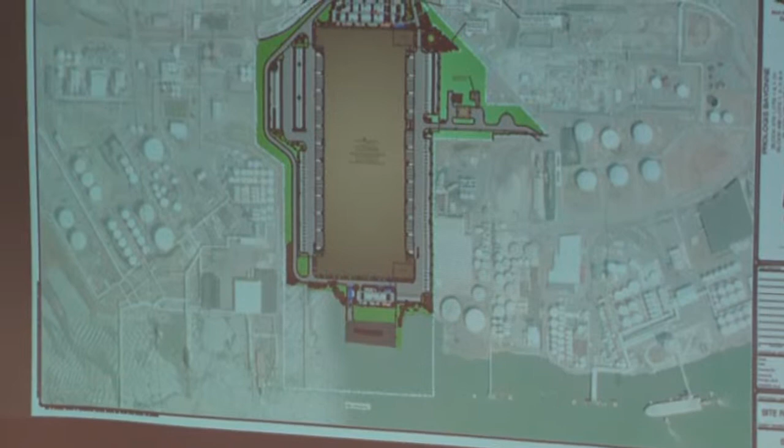So the site plan rendering is similar to what's already been presented to the board. There have been some minor modifications to that. But I'd first like to highlight that the proposed use will be warehouses throughout the entire facility.

We submit approximately 1,683,000 square feet of total warehouse. The Southern Development's warehouse, which I note as Building 1, will be 1,076,579 square feet. Buildings 2 through 5, running clockwise from Building 1, will be 151,613 square feet for Building 2, 124,496 for Building 3, 110,245 for Building 4, and 219,947 square feet for Building 5.

Looking at the site as a holistic development, we will provide a 35.7% building coverage for the entire site.

We're actually reducing below the threshold allowable for the redevelopment plan. For impervious coverage, we're at 74%. Something important to note is that for stormwater and vehicular area specifically, we coordinated extensively with DEP throughout this application, and we're actually going to be reducing the vehicular area on site. So not only are we improving the roadway network with properly paved roads and thoughtful traffic circulation, but we're reducing the amount of area that cars and trucks even travel throughout this site.

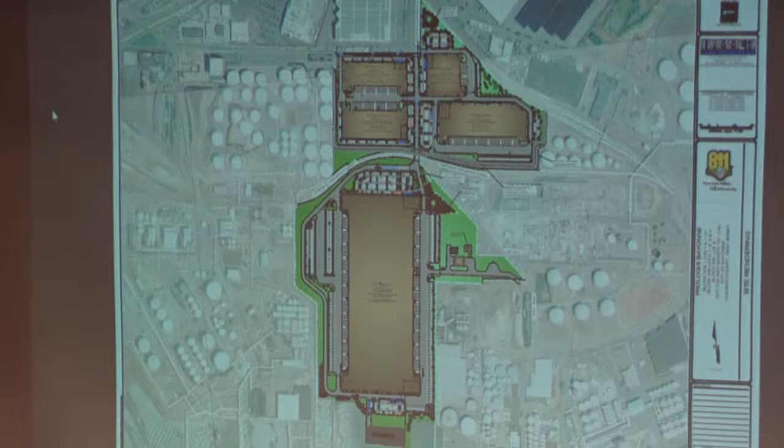In addition to that, 392 spaces for Building 1, Building 2 will have 148 spaces, Building 3 will have 104 spaces, Building 4 will have 128 spaces, and Building 5 will have 160 spaces. This totals to about 932 spaces throughout the site.

Another change that has occurred since we submitted the application was with respect to EV parking. Originally, we submitted for 35 make-ready spaces distributed throughout the site. Your board professionals did identify that variance being a little short.

Prior to this being issued, one of Prologis' initiatives is a net zero standard. We anticipate having 5% day one EV parking for each building. Looking at how the site works out, this will increase us to a total of 50 EV parking spaces, based on the parking provided at CO for each individual building.

These parking spaces will both be ADA as well as near the building entrances to allow for short transit for those people. We will also provide provisions for potential expansions based on tenant needs. But we will be in substantial compliance with the model DCA ordinance for electric vehicles by not only providing make-ready spaces, but day one EV spaces.

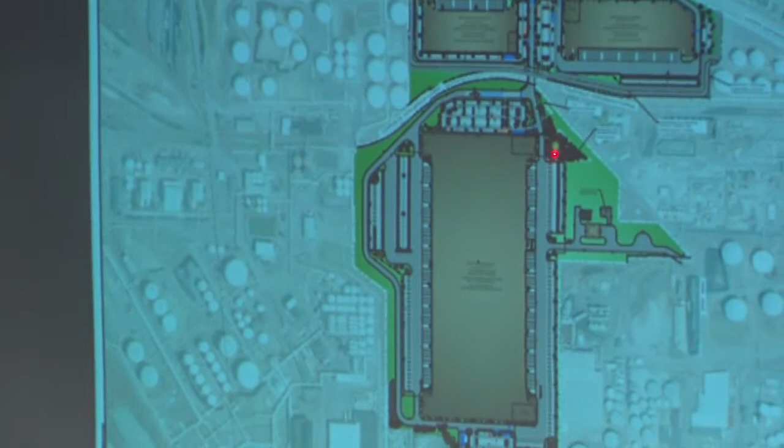Where I'm pointing, the dark green area is our open space recreational use for the southern development. It goes just past the 0.85 acres we were anticipating, so we're providing slightly more on-site. We're providing a canopy shade structure with seating and tables, and meandering walkways, since it's almost an acre in size, running east to west and north to south. At the northern tip there's another seating area, with landscape berms to visually screen someone sitting there. Understand they're in the middle of a truck facility, but this will give buffering to the visual of the trucks decompressing for lunch, as well as a slight auditory buffer.

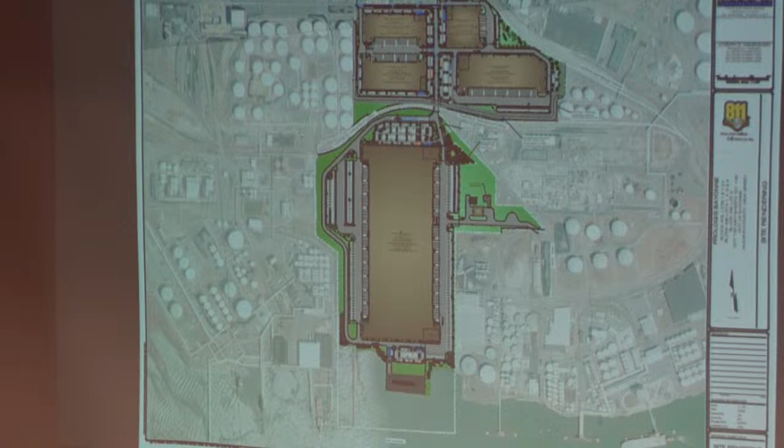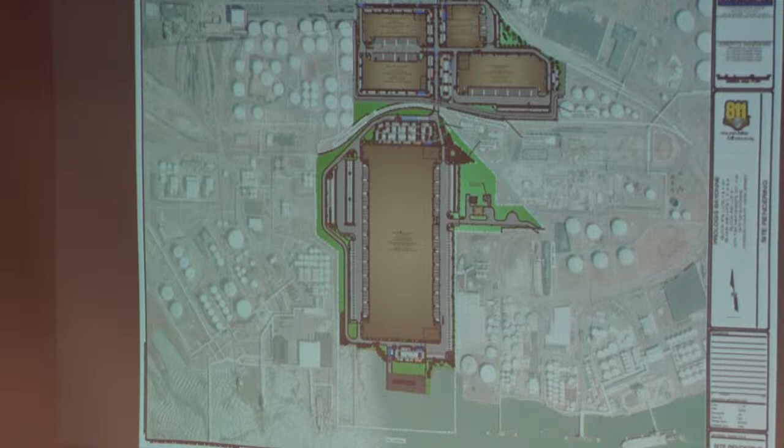Additionally, at the northern portion we're providing a smaller area, approximately half an acre, right at the very tip of the northern development along Avenue J, that's going to have another shade structure. The shade structure's colors will correlate to Prologis' colors - green, white, blue, brown - but not vibrant, slightly muted, so it's not an attention-seeking item.

The rest of the site, we do provide shade trees, evergreens, and shrubs. A comment was requested that we provide some additional diversity to our shrubs, which we have no problem complying with, and we'll provide some additional plantings as well.

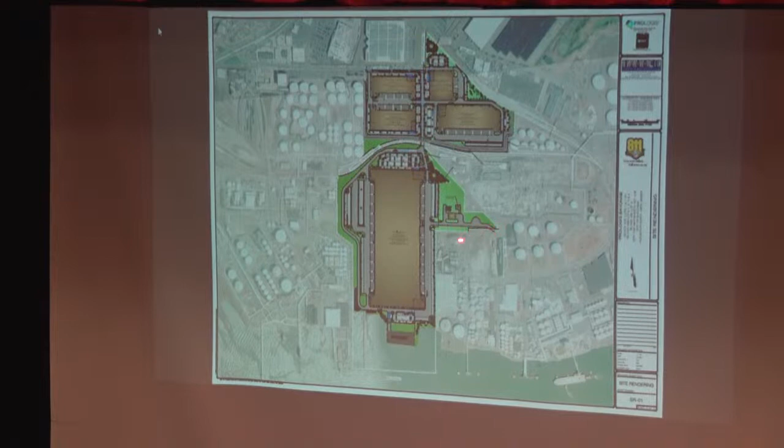The planner's letter identified a potential variance along Hook Road for buffering. We'll comply by planting those trees required per the redevelopment plan - it was just a slight error that we didn't account for. The overall species will be native to the state, though along the southern portion of the parcel along the bay, we had to select salt-resistant trees and plant species because they'll be affected by the kill, which is ultimately connected to Newark Bay.

Alicia, could you turn to Exhibit A50, the signage exhibit?

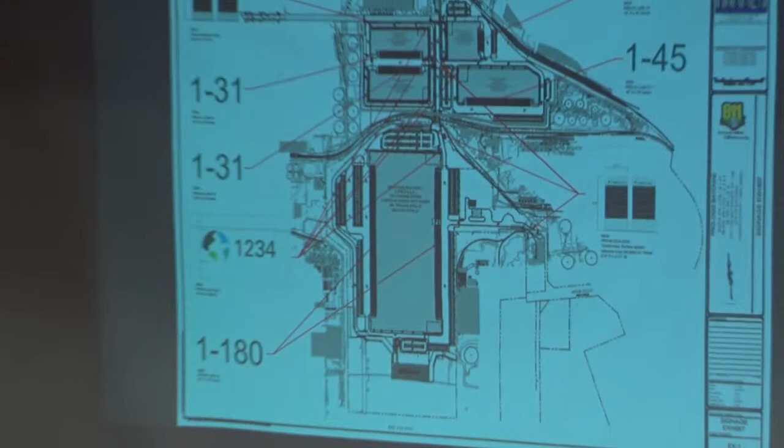If a specific tenant were ever to request additional signage beyond what we're providing here, we would be back before the board. We don't anticipate the need for that, but I wanted to identify that we've had that in mind as a potential thought.

I apologize, one item I forgot to mention during my site plan testimony was the separation from the tanks. As I stated previously, in the northern development all of the tanks on the northern parcel will be removed from our development. With how the existing tanks are constructed, the requirement is half the diameter of that tank as the minimum separation for any building on the same property. I understand we're on a separate property, but the largest potential setback we'd need to meet is 74.5 feet throughout the site, north and south.

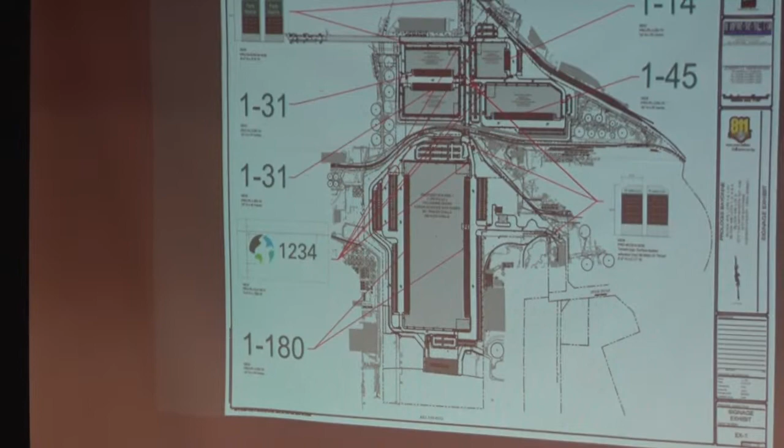The closest building we have to any tanks is actually 120.6 feet. So we're nearly double — we well meet the requirement, almost double what's necessary for a setback from an existing tank.

These tanks on site — there was a variance approved for the northern development due to proximity to the property line. That tank's gonna get removed. It was located at the southeast portion of property 1, and that tank will no longer be there, relieving that lot from the variance previously approved.

Mr. Souza, are you referring to the NFPA regulations? Yes, I am. So you're saying it's double the requirement? Yeah, it's nearly double — not exactly, I can give you a building-by-building analysis if you'd prefer, I just tried to keep it broad. No, testimony's fine, I was just confirming that's what we're talking about. Okay, it was the NFPA requirement — due to the tanks being foam insulated or protected by foam, that triggers the setback requirement of half the diameter of a tank.

The largest tank is actually located at the southeast corner on the southern parcel. That tank's about 150 feet wide, which is where the 75-foot regulation comes from, and the distance from that tank to building 1 is actually 291 feet — so in that case we're tripling. But I wanted to highlight the biggest separation needed versus the closest we are.

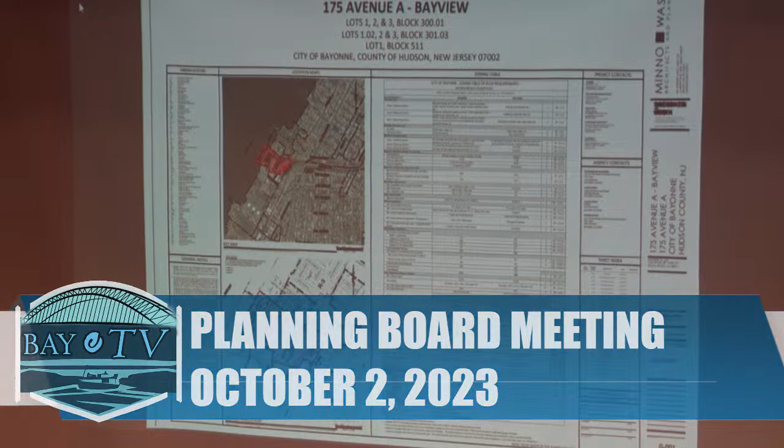Thank you. Mr. Newells, can you quickly orient the board to the site? Sure, is it possible to bring up A31, the amended final subdivision site plan. Sorry, it's a big file, it's going to take a minute to open. I'll start from the cover sheet. You can see the little map in the upper left part of the sheet, highlighted in red. The site is basically, as Mr. Maselli indicated, the former home of the A&P Supermarket Retail Center, located on the west side of Avenue A, approximately across from where the exit ramp from 440 southbound enters the roadway. That's a good location of the site. It has frontage on the Newark Bay as well, on the left side of the site.

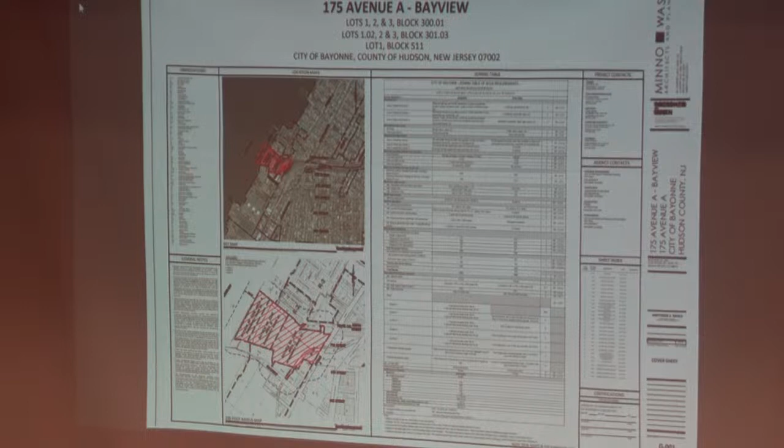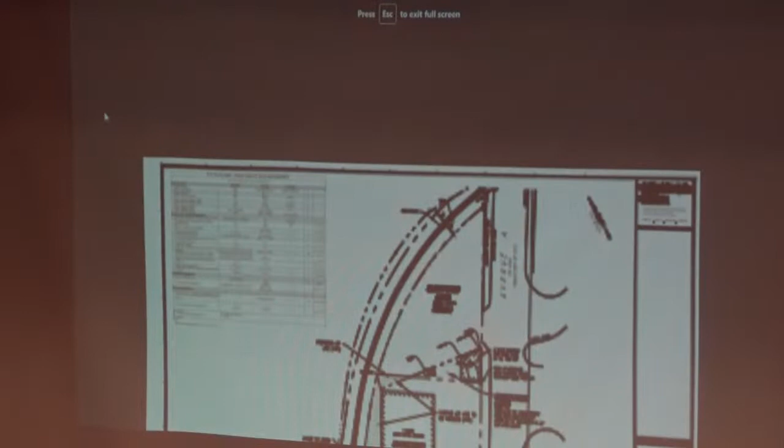Thank you, can you quickly run through the approvals we got, in a 30,000-foot view, the subdivision approval we obtained last time we were here? Sure, could you advance to the second sheet, please, with regard to the subdivision. I'm sorry, maybe the third sheet. There we go, okay, so this is a zoomed-in area. This is a subdivision plat that's part of our set of drawings that was submitted, and this is a zoomed-in view of sort of Avenue A, as well as the area across on the right side. You can actually see drawn in there the exit ramp coming off of Route 440 southbound.

So what's happened is the Lot 3 portion, the pie-shaped piece on the north side, is part of the Bayview site that we received approval for in 2021. But down below, you see a rectangular building, and that property, which is Lot 1.02, is the existing retail center to the south of a piece of the Bayview site. So what we've done here is shaded in a gray area, the proposed area to be taken from the Bayview site that was approved previously and appended to the Lot 1.02 site. That does a couple things: it helps smooth out the property lines so they're more regular.

They're not quite 90-degree angles, but you get a better angle in the back of the property. It does provide access to the back of that retail building for the owners, because previously the lot line was right on the edge of the building wall. It also helps make that lot not as isolated as it would have been, it would have almost become landlocked with the proposed driveway shown. So those are really the reasons for the subdivision there.

Stepping back for a minute, last year we were approved for a preliminary final major subdivision on the actual A&P lots. Was that to create 5 development lots and 3 publicly accessible common lots? That's correct. That has not been perfected yet, correct? That has not been perfected yet. But that's not the subject of this application. We're not changing that subdivision at all. This subdivision just relates to these 2 properties on the right side of the railroad, whereas the prior subdivision was wholly on the left side of the railroad.

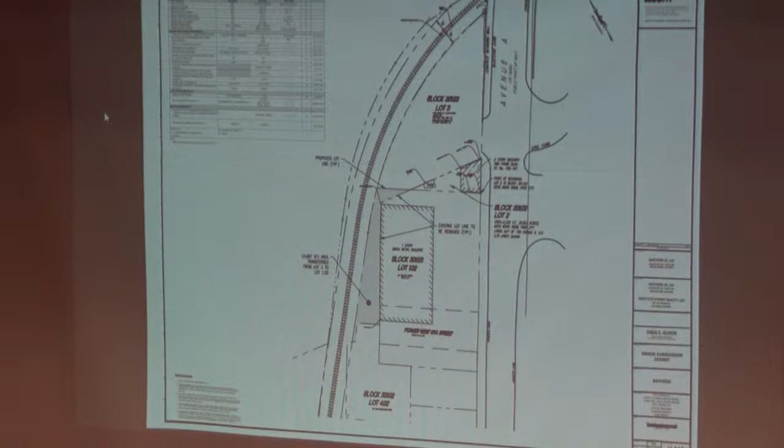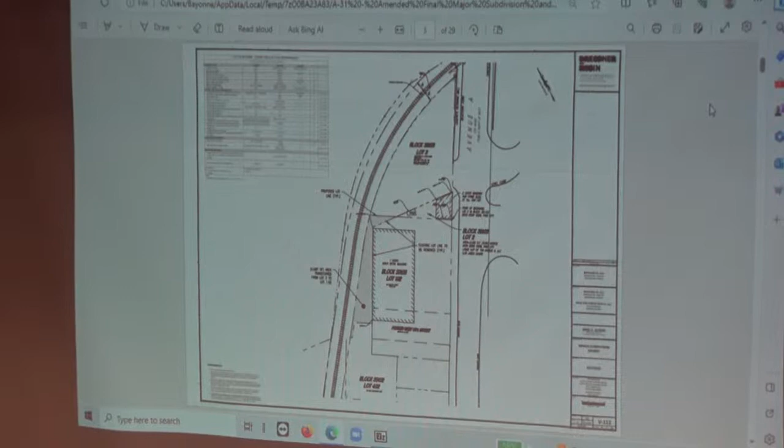So, that's correct. Could you please advance to the very next slide? That would be helpful. I believe you do have the laser pointer if you wish to use it for the benefit of the audience. Oh, that's helpful. I know, for the benefit of the audience, it may help because sometimes it's hard to see. All right, thank you. Next slide, please.

Yep, there we go. That's the overall site, right? So just quickly, in a summary fashion, go through what was approved and what we're seeking approval for. Yes.

There it goes, it takes just a minute. There we go. Okay, so you were just mentioning building B4, which is this building here in the lower left-hand corner, southwestern portion of the site. That's the building that had a preliminary approval previously and is seeking final approval on that tonight. So we can move on to going through what we're proposing.

Yeah, let's just move through quickly. This was the approved site plan. What changes are we proposing in tonight's application? So one of the things that changes is the shape of this pier back here.

This pier is required to be, I think, 1,600 square feet. We have roughly 1,700 square feet, which is good in size. We went through the approvals with the New Jersey DEP for the waterfront development permit, which included that pier, as well as the Army Corps of Engineers. That's what resulted in the shape of it being different than before. It does meet the DEP's rules as far as width and limiting shading of the water. We also shaped it to avoid some existing structures there, former bridge piers. So the pier is more than 1,600 square feet in size, and that is one of the thresholds for the bonus we'll get to later in the presentation.

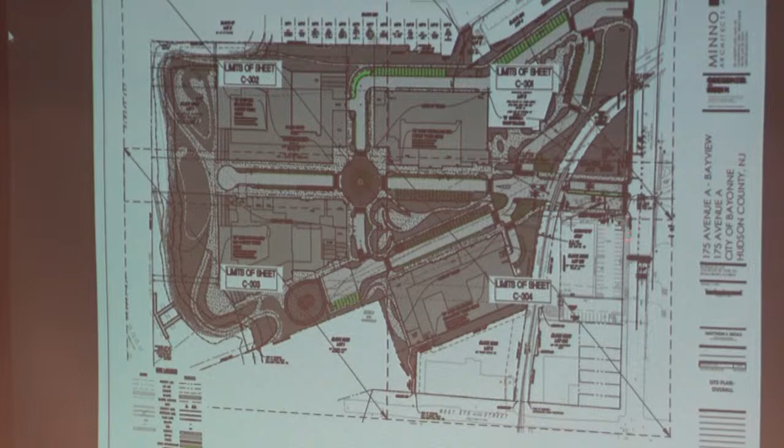One of the other things that's harder to see on this slide, but I'll point to it because of the location. We spoke about the subdivision happening here, this adjacent retail property to the south of the proposed driveway. It currently has a driveway onto Avenue A just south of the new intersection. To smooth out traffic operations in that area, we're proposing to close off that driveway and create a new driveway from that parking lot onto our existing driveway, so people exiting the retail center can take advantage of the signal here for a much safer, better way to access Avenue A. This eliminates a potential traffic conflict from having a driveway just south of the intersection. That was one of the changes.

The other things we talked about - I already touched on the modification to the pier design, and we made modifications as required by the resolution of approval in 2021. One thing we did was modify the design of Building 3, right under this label - there's a projection of that building, and we were able to pull it further back from the property line. Originally it was at 31 feet, and at the request of a neighbor and the board previously, we were able to pull that back to 40 feet to increase the buffer between that building and the existing neighborhood to the north.

We were able to eliminate some issues having to do with lighting, particularly along this walkway coming down toward West Fifth Street. We eliminated that issue, increased the number of bike spaces, and increased sidewalk widths in different areas of the site. So I think that addresses those items. There are some minor changes to building B4, which will be addressed by the project architect after my testimony is complete - B4 being that southeasterly building on the lower right-hand side of the page.

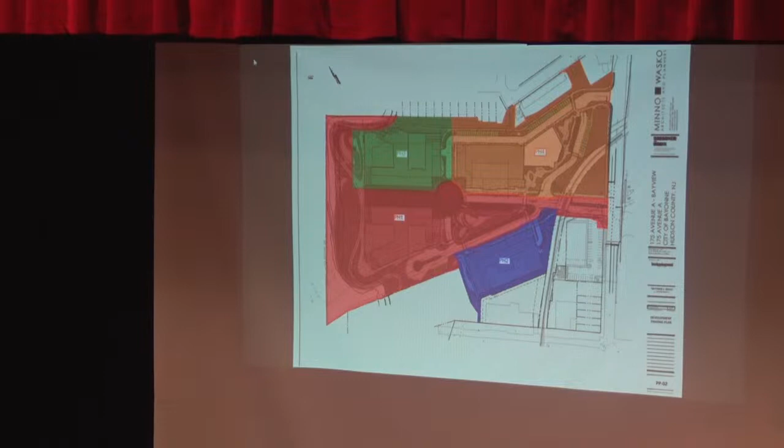I think the planner's report asked if there's going to be any proposed fee for the on-street parking. I don't think there's any plan to do that, right? I don't know of any plan for that. And will we be willing to submit a security plan as part of resolution compliance for our parking areas—in other words, in our decks, to make sure they're secure and safe? Yes, yes, of course.

EV spaces—you mentioned we will be compliant. We agree to comply with that requirement.

The redevelopment plan calls for 1 space per every 30, and we've provided that. We'd provide 54 spaces, which is the calculation you get when you divide the number by 30.

About 163 publicly available parking spaces are being provided, correct? Correct. Where are those located mostly? Those are located throughout the site, along the sides of the roadways. There's some spaces down in the lower left-hand corner. Ultimately they're scattered throughout the site along the sides of the site roadways.

I think that will do it for my questioning of Mr. Knowles. If the board has any questions? Thank you. Commissioners, any questions for Mr. Knowles?

Commissioner Mayorano? I do have two quick questions. I know my grandfather always used to say there's no such thing as a stupid question. I may prove him wrong tonight.

Freight rail traffic, I should know this. Is there still any active freight rail traffic on that line? I think it's very rare, from what I understand. I've never seen it, but I think there is some. I don't think it's ever been closed. There is. Okay, thank you.

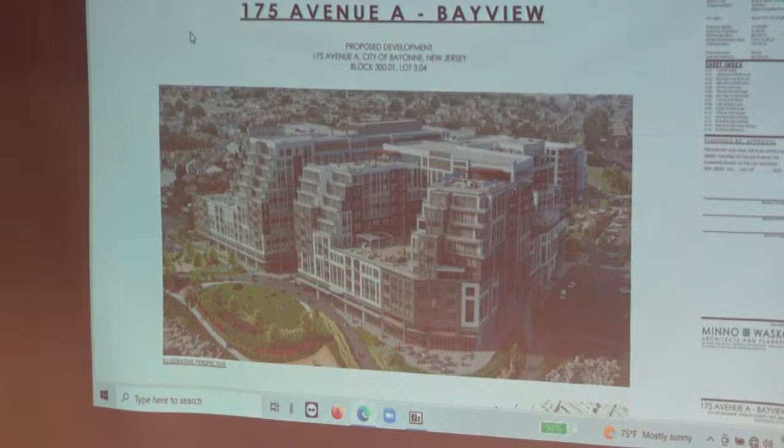So with that, if we could advance the slide to the second page here, this should be sheet A01 of the architectural site plan submission set, showing the ground floor of the building. With this, I'll walk you through the biggest revisions to the project. Again, we had seen a massing image of the building and an illustrative perspective rendering.

The exterior architecture found on the building remains substantially similar. As noted, the biggest changes, which were outlined well within your professional planner's report, really have to do with where the main residential lobby entrance is and where some of the retail and residential amenities are. The primary residential lobby is located on the north side of the building, matching its previous location. We've further worked through the layout of the ground floor, including where the reception desk is and where mail, package, and similar uses are located.

The commercial retail is predominantly located on the eastern side of the building, which has visibility and fronts right on that promenade and roundabout as you're coming down the central boulevard on the center axis of the site. This allows for more marketable retail and better activates the ground plane of the building. The restaurant area, shaded in light orange, is generally located in the same location, providing convenient drop-off access off of the circle being planned there, as shown in the civil site plan.

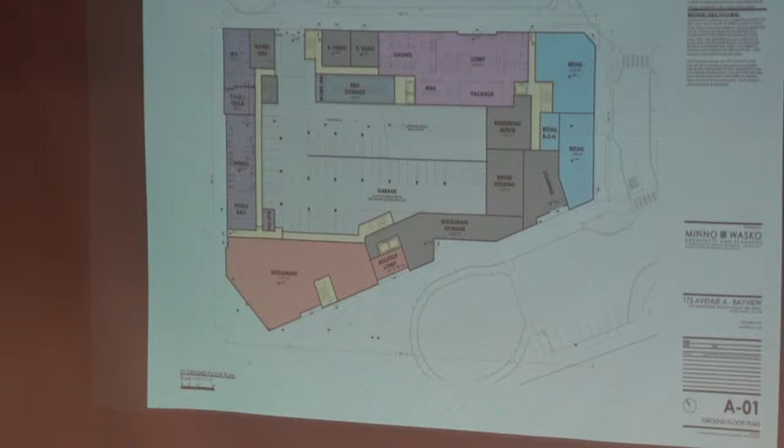Sure, just two quick questions. So there are some design requirements for the interior of the units in terms of soundproofing and provision of washer, dryer, cable TV, things like that. Will we comply with those requirements? Great question.

I don't believe there are any requirements within the redevelopment plan. There was a question in the planner's report about sound attenuation between units. I'm not aware of any local ordinance, but the project as designed will comply with the 2021 version of the International Building Code, adopted by New Jersey, which has STC sound attenuation requirements and ratings, side to side or up and down between units. We design thousands of these luxury mixed-use apartment units across the state, and we'll fully comply with the state building code requirements as well as any local ordinance.

And the washer, dryer, cable—so all that? Right, so every unit will have a full-size stackable washer dryer internal to the unit. And I think there was a question about cable TV access—yes, every unit will have access if a resident chooses to pay for Wi-Fi service or cable service. Every unit will have that capability, either through Wi-Fi streaming or a dedicated line.

I have one question. I think it was in Mr. Reichel's report, there was a reference later on to a sign deviation, though I didn't find one identified. I think there was one way back, and I think we eliminated it—is there still one? There isn't, right? I just want to make sure. That wasn't in your report? No, I thought there was. No, there were no sign deviations associated with this application. My understanding is that the signage as proposed fully complies, and I believe the planning report and/or Mr. Reichel's report stated the same. That would conclude my questioning.